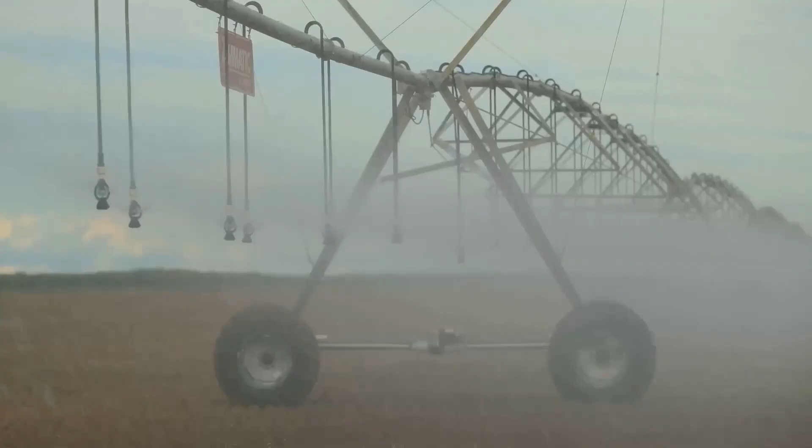The choice of irrigation method depends on factors like crop type, land slope, soil characteristics, and budget. Farmers should carefully evaluate the advantages and disadvantages of each method to determine the best way to irrigate. An investment in your farm's irrigation method pays dividends in the long run, economically and environmentally. Here are some practical tips for farmers to consider when planning irrigation water management.

Increased crop residue left on the field will reduce the potential for irrigation-induced erosion, increase the infiltration of water into the soil, and reduce evaporation from the soil surface. There is a potential for spray drift and odors when applying agricultural and municipal wastewaters. Time irrigation based on prevailing winds to reduce this potential. In areas of high visibility, consider irrigating at night.

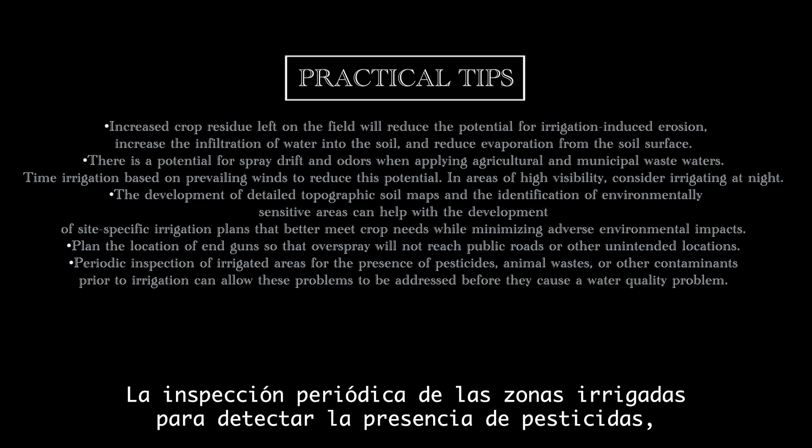The development of detailed topographical soil maps and the identification of environmentally sensitive areas can help with the development of site-specific irrigation plans that better meet crop needs while minimizing adverse environmental impacts. Plan the location of end guns so the overspray will not reach public roads or other unintended locations. Periodic inspection of irrigated areas for the presence of pesticides, animal waste, or other contaminants prior to irrigation can allow these problems to be addressed before they cause a water quality problem.

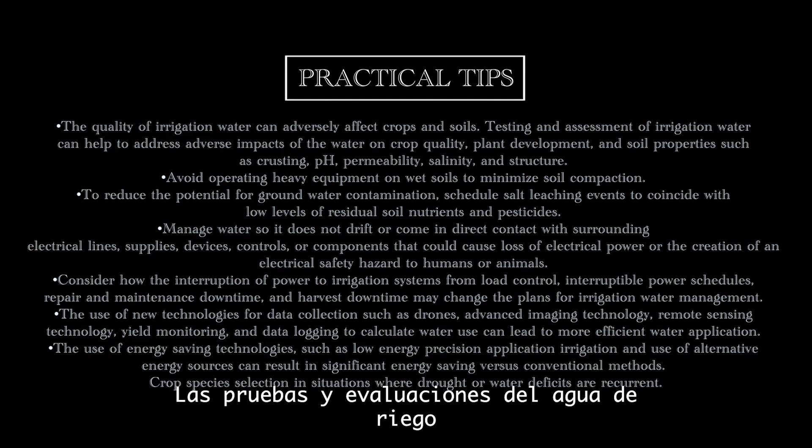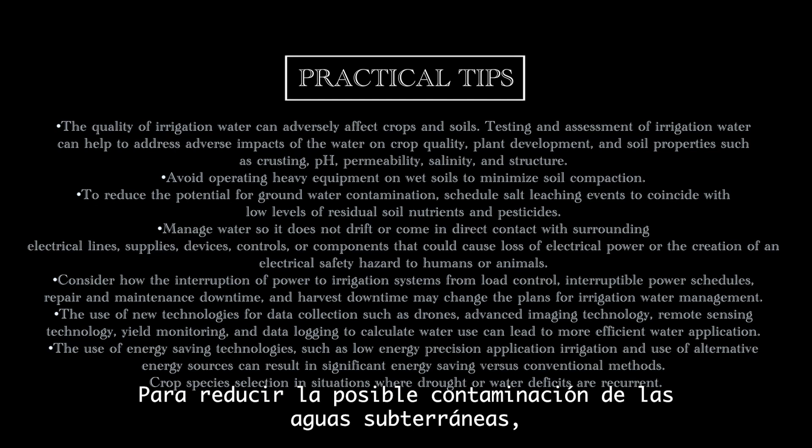The quality of irrigation water can adversely affect crops and soils. Testing and assessment of irrigation water can help to address adverse impacts of the water on crop quality, plant development, and soil properties such as crusting, pH, permeability, salinity, and structure. Avoid operating heavy equipment on wet soils to minimize soil compaction. To reduce the potential for groundwater contamination, schedule salt leaching events to coincide with low levels of residual soil nutrients and pesticides.

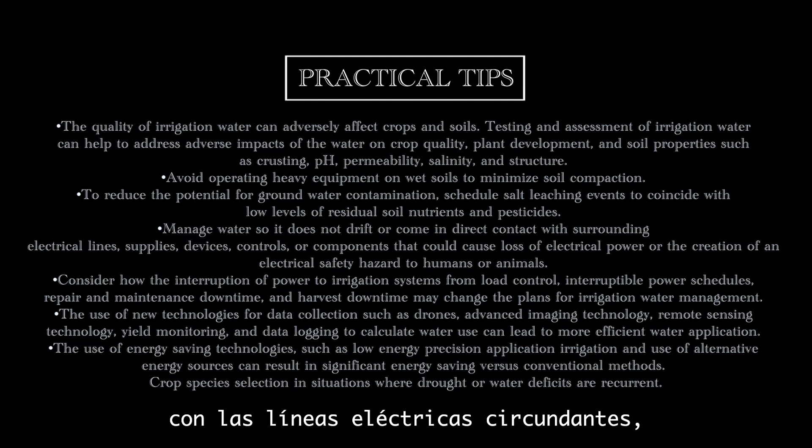Manage water so that it does not drift or come in direct contact with surrounding electrical lines, supplies, devices, controls, or components that could cause loss of electrical power or the creation of an electrical safety hazard to humans or animals. Consider how the interruption of power to irrigation systems from load control, interruptible power schedules, repair and maintenance downtime, and harvest downtime may change the plans for irrigation water management.

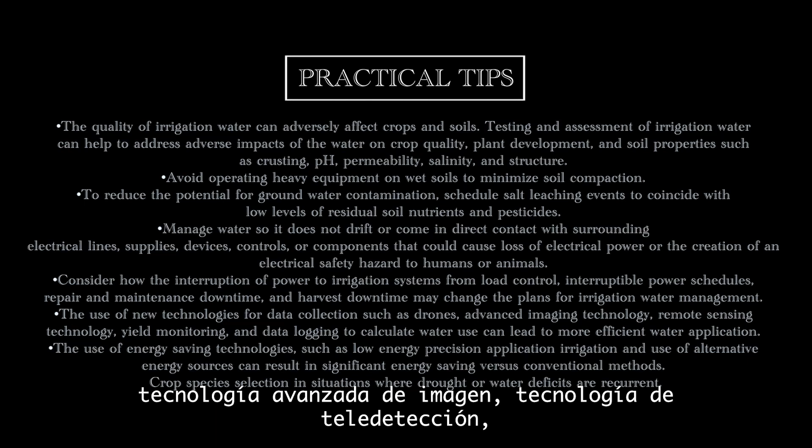The use of new technologies for data collection, such as drones, advanced imaging technology, remote sensing technology, yield monitoring, and data logging to calculate water use can lead to more efficient water application. The use of energy-saving technologies, such as low-energy precision application irrigation and the use of alternative energy sources, can result in significant energy savings versus conventional methods. Consider crop species selection in situations where drought or water deficits are recurrent.

NRCS conservationists can help with a conservation plan which assists a participant with implementing their conservation plan by providing site-specific instructions, requirements, plans or specifications for putting conservation practices and enhancements on the land. Conservation planning may involve providing assistance for a single conservation practice or a combination of structural, vegetative, or land management conservation practices, enhancements, and management activities.

Prior to initiation of the design and implementation activity, the technical service provider, TSP, will schedule a conference with the participant and the Natural Resources Conservation Service field office staff to ensure an understanding of the participant objectives. The meeting between all parties may take place in person or electronically.

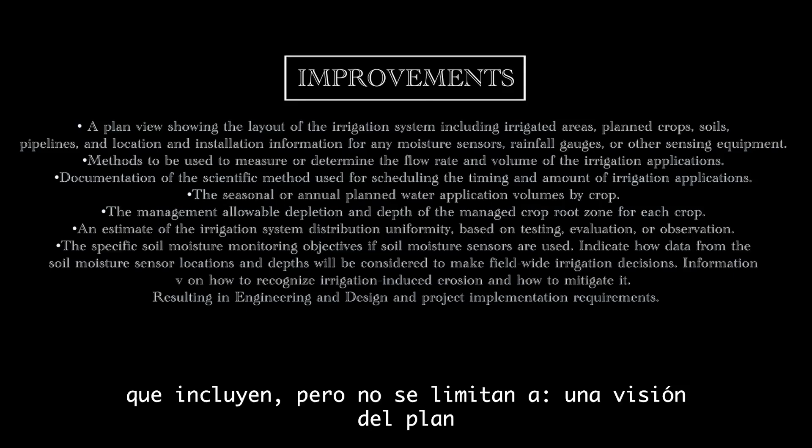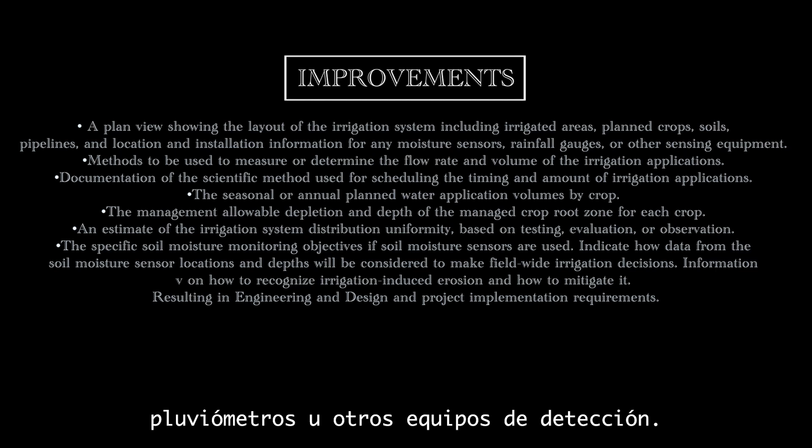Next, NRCS will prepare plans and specifications that describe the requirements for improving the irrigation system, which include, but are not limited to, a plan view showing the layout of the irrigation system, including irrigated areas, planned crops, soils, pipelines, and location, as well as installation information for any moisture sensors, rainfall gauges, or other sensing equipment. Methods to be used to measure or determine the flow rate and the volume of the irrigation applications.

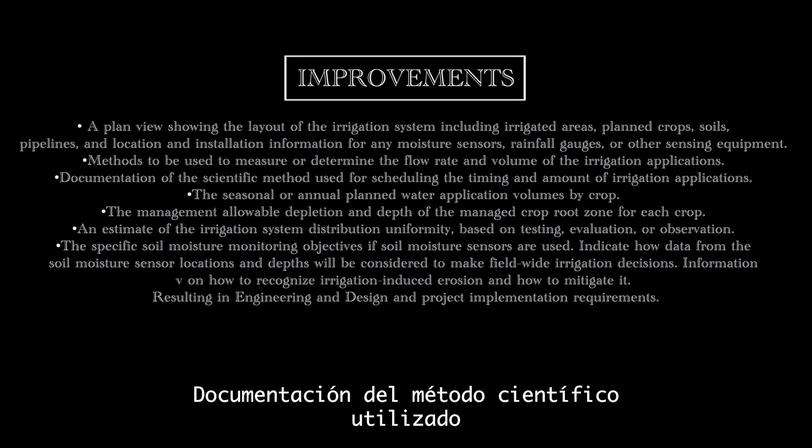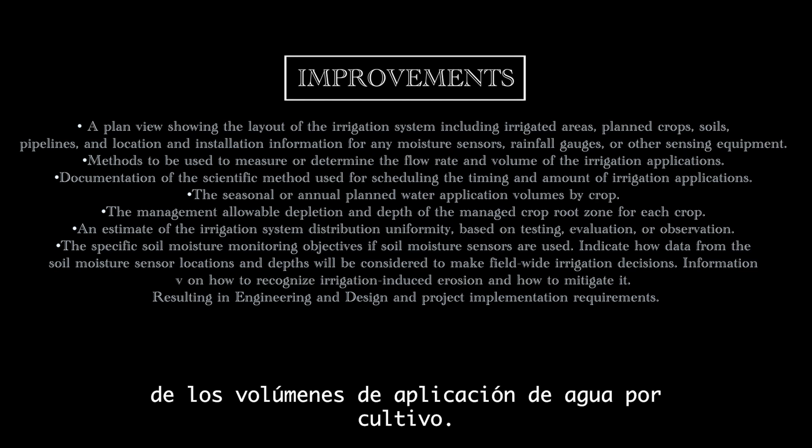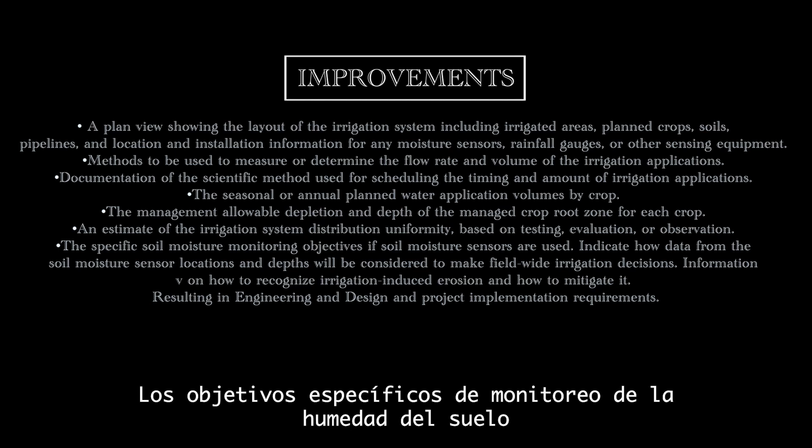Documentation of the scientific method used for scheduling the timing and the amount of irrigation applications. The seasonal or annual planned water application volumes by crop. The management allowable depletion and depth of the managed crop root zone for each crop. An estimate of the irrigation system distribution uniformity based on testing, evaluation, or observation. The specific soil moisture monitoring objectives if soil moisture sensors are used. Indicate how data from the soil moisture sensor locations and depths will be considered to make field-wide irrigation decisions.

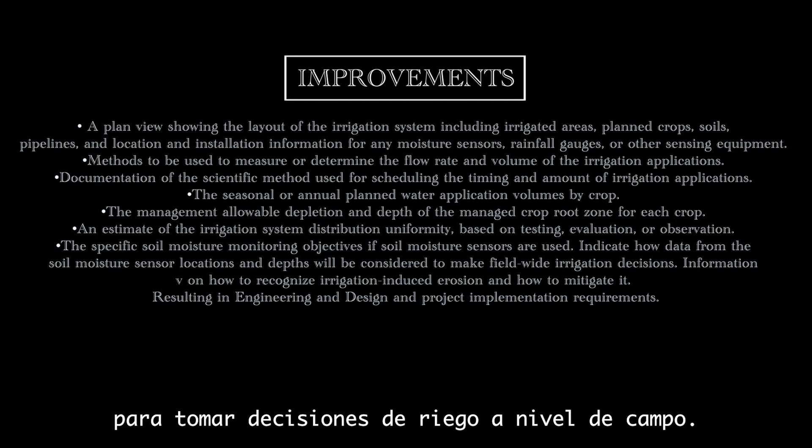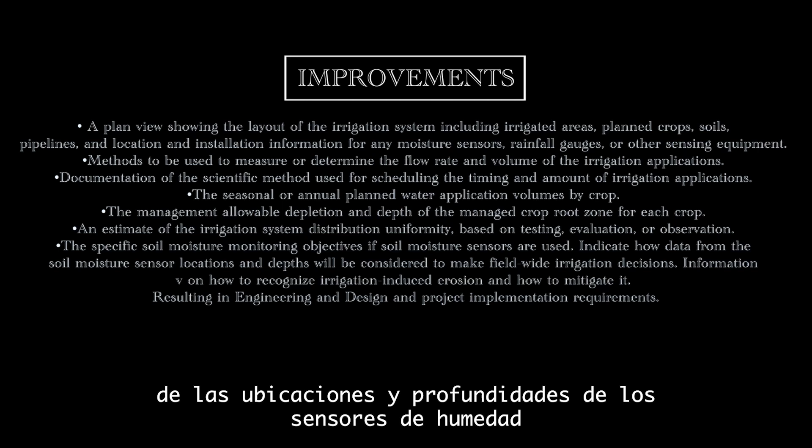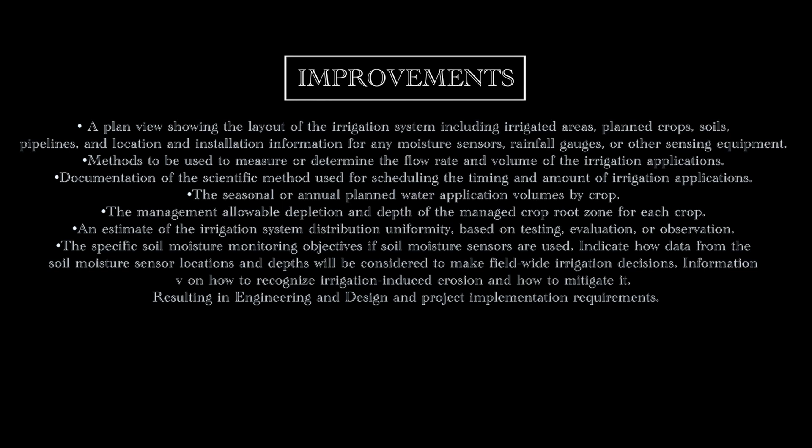Information on how to recognize irrigation-induced erosion and how to mitigate it. This will all result in engineering and design and project implementation requirements. Then finally, NRCS will help prepare an operation and maintenance plan for the operator. At a minimum, the following will be included in the O&M plan.

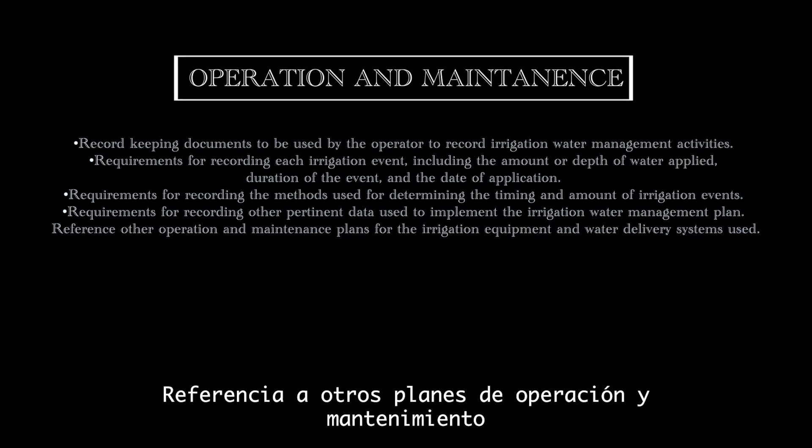Record-keeping documents to be used by the operator to record irrigation water management activities. Requirements for recording each irrigation event, including the amount or depth of water applied, duration of the event, and the date of application. Requirements for recording the methods used for determining the timing and amount of irrigation events. Requirements for recording other pertinent data used to implement the irrigation water management plan. Reference other operation and maintenance plans for the irrigation equipment and water delivery systems.

By implementing these practical tips, farmers can optimize their irrigation practices, save water, and improve crop productivity. Irrigation plays a vital role in global food production, but it also puts pressure on our precious freshwater resources. As stewards of the land, farmers have a responsibility to irrigate sustainably, balancing the need to grow crops with the imperative to protect the environment.

Efficient irrigation planning is essential for sustainable water management. By using water wisely, we can ensure that there is enough to meet the needs of both agriculture and the environment. It's not just about growing more food, it's about growing food responsibly for generations to come. Together, by embracing innovative technologies, adopting best practices, and working in harmony with nature, we can create a future where agriculture and the environment thrive in balance.